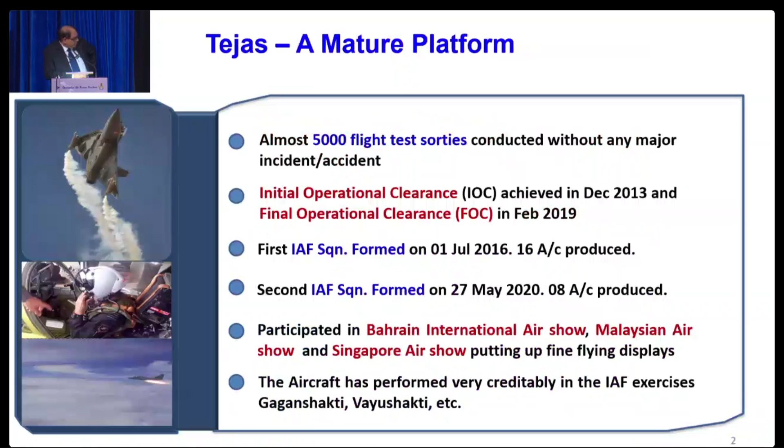Some of the accomplishments of Tejas, other than the obvious ones, which is fly-by-wire flight control and so on, is we have done trials in all the conditions in India, the hot weather conditions, because these are learning exercises. Operating at 48.5 degrees centigrade, how to make all the electronics work and all that. That was a learning. Takeoff in high altitude, hot weather conditions in Leh, as well as operating at minus 15 degrees centigrade at Leh and starting the engine without external assistance.

Achieving good accuracies with the air-to-ground weapons and integration of the missiles, the close combat missiles and the BVR missiles. All these were learning exercises which have been now imbibed, and we are now ready to go ahead with all these technologies. Air-to-air refueling, again a major technology, was successfully demonstrated with the drop tanks and fuel transfer in the air.

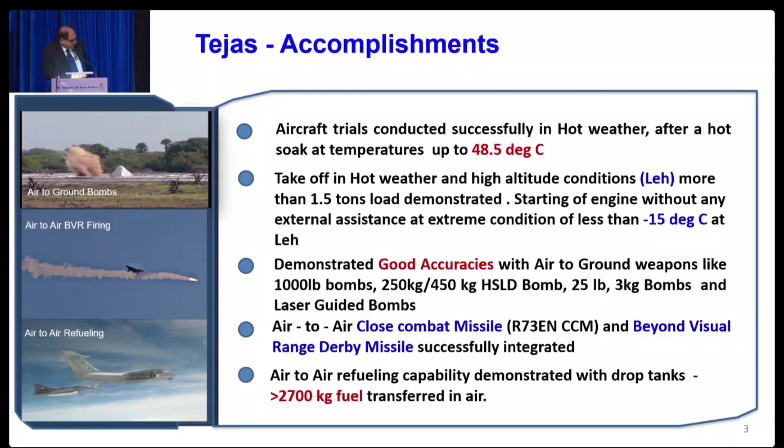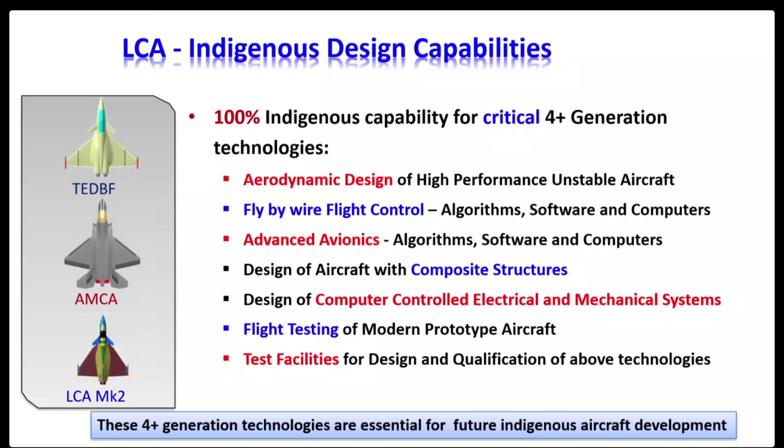So Tejas is not just an aircraft platform. It is actually a representation of maturity of various fourth generation technologies today that we have achieved. And that is really the takeaway from the Tejas program. Yes, there are a lot of imported equipments on Tejas. It's about 60% indigenous, but there are many imported equipments. But one thing that is 100% indigenous in LCA is the design.

And so we have got 100% indigenous design capability in areas like aerodynamic design of such a high performance aircraft, fly-by-wire flight control, the advanced avionics, the integration of all the weapons, sensors and so on, and the displays. Composites, this aircraft has a very high degree of composites. So that technology has now been matured in the country. Computer control of all the mechanical systems, everything is controlled by computers, and that part is also now mastered.

Another technology in which many people here in the audience are involved is flight testing of modern prototype aircraft. Those who have gone through it would realize that we took a lot of time in taking small steps because of the uncertainties, the risks, mitigating the risks and so on. For example, going from 20 degrees angle of attack to 21 took almost 2 years because of understanding what is the kind of risk and how to do high angle of attack flight testing.

The test facilities required for all these designs are now in place and well established in the country for taking up any further designs of this kind. So all these technologies are key technologies required for any future aircraft design in the country, whether it's Mk2, AMCA or, as I said, the TEDBF, the naval version. So this is like the national wealth we now have in this country, which is ready and available for all your future programs.

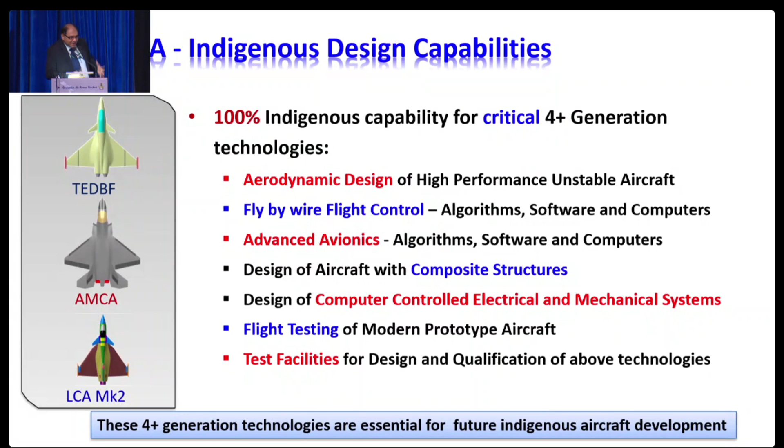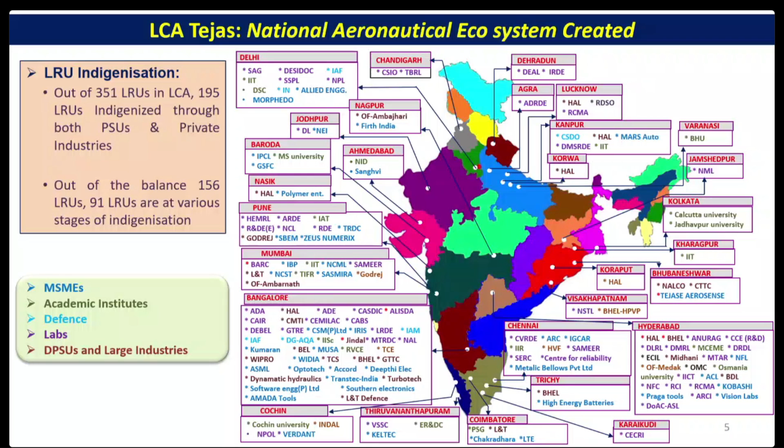It is not only ADA who has worked. The whole nation has worked for this program. And there's a huge ecosystem created in the country. There are more than 300 work centers, small and large, in PSUs, academic institutions, private industries, MSMEs, and so on, who are actively contributing to this program. And this ecosystem is not what HAL has. HAL has a separate ecosystem for production. What I'm talking about is the design ecosystem, which is something unique, available in the country today.

As far as indigenization, as I said, about half the LRUs are indigenized, but rapidly, more than 91 of the remaining 150 LRUs are under indigenization, and more than 40 are through the Technology Development Fund, where MSMEs have taken up 40 LRUs for indigenization. So that effort is also moving very well in the country.

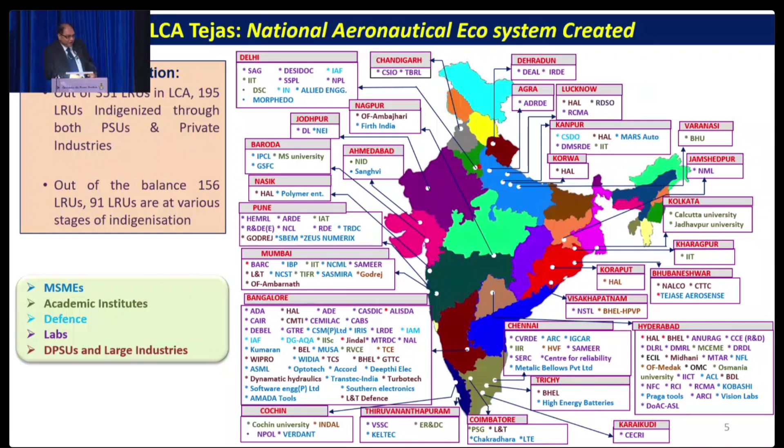So what next? So the next program after LCA was an enhanced version of LCA, a bigger platform, a more capable platform, which was the Mk2. So this was conceptualized as a replacement for the Mirage class of aircraft. LCA was for the smaller MiG-21 class.

And this Mk2 is with enhanced capabilities with AESA radar, internal electronic warfare system. LCA has a podded one. The IRST, MAWS, and various other sensors. Enhanced range and endurance with a higher internal fuel, in-flight refueling, and OBOGS. OBOGS will get integrated in Mk2. OBOGS is ready now. A much higher weapon carrying capability, and capability for carrying heavy standoff weapons of the class of Crystal Maze, Scalp, Spice, and so on.

As far as Mk2 is concerned, the configuration is chosen, the system architecture is finalized, all the design is complete, and the critical design review is also completed. And the detailed design drawings, more than 15,000 of them, of all the parts, are now ready. So we are ready to go into the prototype manufacturing stage.

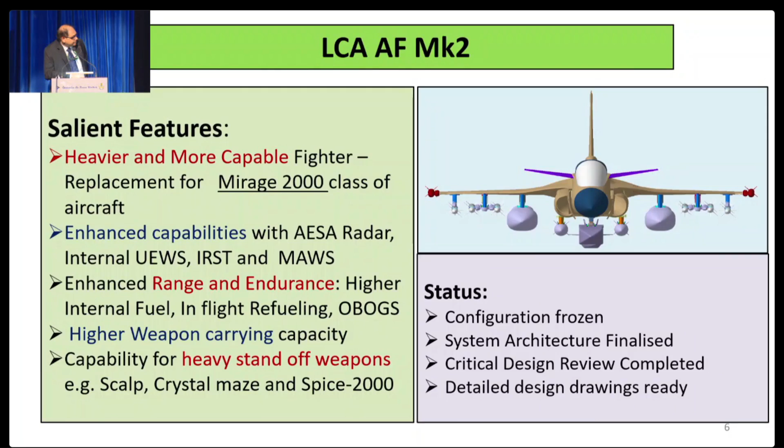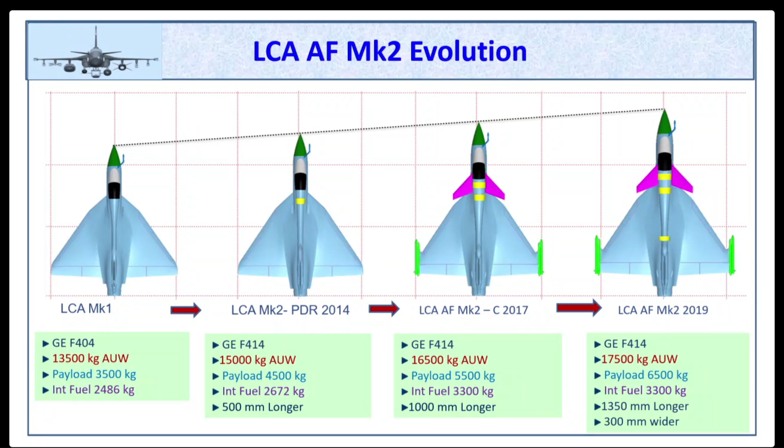Mk2 was an interesting evolution. In the beginning, it was felt that let us just re-engine LCA with a more powerful engine. That was the initial thought process. So till about 2014, we worked on that, and a PDR was conducted where a re-engined LCA was designed, which had no significant changes to the basic design, but only the re-engining part.

Subsequently, because of production, ease of production, it was decided we'll go for Mk1A, 83 more, which is the same structure as Mk1. And at that time, it was felt that then the Mk2, now we can move up to the higher grade, a more capable aircraft with a much higher range and endurance to start with. And this implied carrying more internal fuel. To do that, we had to design this aircraft to take care of the reduced instability due to the additional fuel. And that's how the canards came in.

There was a lot of deliberation between canard, strakes and various configurations. So this was decided finally in 2017. And this shows the maturity of the design process, because the designers now are capable of reacting quickly to changing configurations and coming up with new designs.

And finally, in 2019, we froze on a configuration which could carry heavy standoff weapons. So the aircraft was widened, the length was increased further, and this was the final configuration in 2019, for which the PSQRs were frozen. So this had a much higher capability for payload, internal fuel, and so on. It was a 17.5 ton all-up weight aircraft.

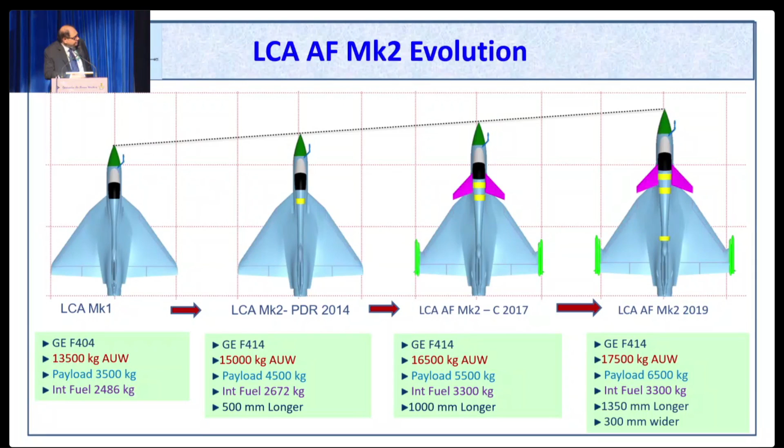The Mk2 incorporates a lot of advanced features, which are over and above the Mk1. Some of them, as I mentioned, were IRST, MAWS, but more importantly, the cockpit has been changed completely now. We are going for a side stick configuration to enable a large area display and advanced HUD also in the cockpit. So this is a very modern cockpit, which is coming in Mk2. And it has got, as I said, an internal electronic warfare system.

Another important change is the multifunction air data probes in the nose. So we have removed the nose probe, which improves the radar performance significantly. So the probes are all behind the radar. And that is an important change, the multifunction air data sensors. And many more, OBOGS, in-flight relight capability, and so on.

Now, what is important here is all these are new features beyond LCA. LCA design was in the 90s. So these are all the new features which are coming into Mark II, which flow seamlessly into all the future programs. And we had to take this jump because for a new aircraft, we would rather go for the newer technologies, as Chief was mentioning also in the morning.

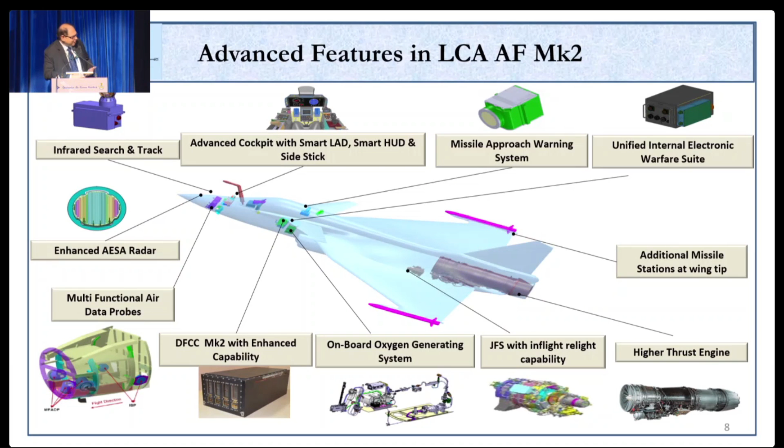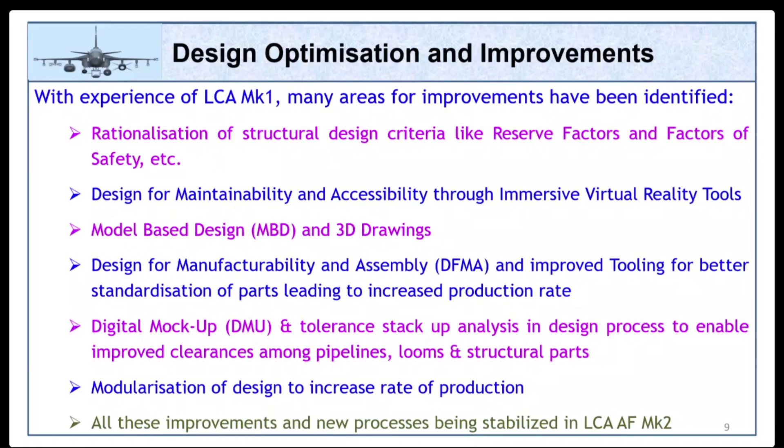And there are many more improvements that have been incorporated in Mark II. These are lessons learned from Mark I. For example, the structural design criteria has been rationalized completely based on the experience of Mark I. To some extent, Mark I in some places was conservative design. So all that conservativeness has been worked out, and we have evolved a new design process for structural design, which helps us to reduce weight significantly.

The design has catered for maintainability and accessibility right from the design phase, which did not happen in LCA. So, for example, using virtual reality tools, the field engineers, field operators from the Air Force actually try out on the VR model whether maintenance is possible, whether parts are accessible, and so on, right in the design phase before the aircraft is made.

So that is something we have done here. Another important thing is model-based design. So, for example, drawings are no longer 2D drawings on the paper. They are 3D models. And this was not easy. It can happen easily in your lab, but it also has to happen on the shop floor. The shop floor technician should not finally print out a drawing and start using it. So you have to provide him the tools to be able to see 3D models on the shop floor. And that is what has been done.

And of course, design for manufacturability, assembly, which are lessons learned through the Mark I program, DMU, and so on. So a lot of new features have come in here. And all these improvements are actually flowing into all the future programs. And Mark II is a good case study or a good example to implement all these so that all these are also matured for the new programs. And we are at that stage now. In Mark II, this has been done now in the design phase.

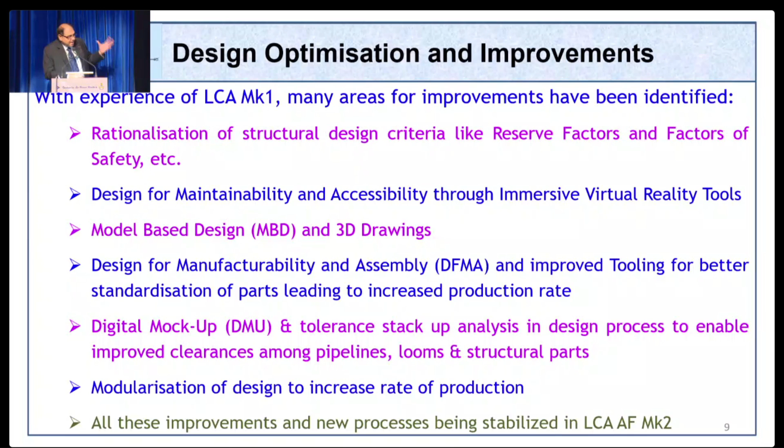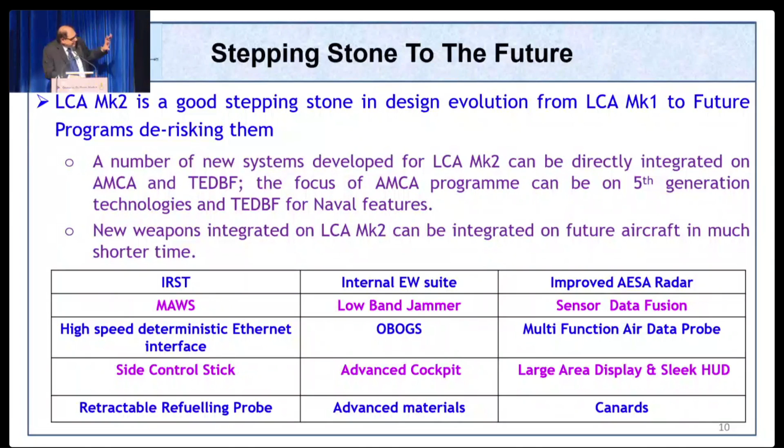So the Mark II is a very good stepping stone in the design evolution from LCA Mark I to all the future programs, which de-risk them. So that when we are in AMCA, we concentrate on the stealth technologies and not the basic aircraft design technologies, which are actually matured through Mark II now. So these are the list of all the technologies which are already integrated in Mark II, which will go into the future programs.

So the next program that is already underway is the 5th generation AMCA program. And it is a twin engine stealth aircraft. So there are many new technologies, twin engine for the first time. And of course, stealth shaping, an internal weapon bay to carry the weapons in the stealth mode, various materials and radar absorbing structures. And it was decided with the IAF that AMCA will be developed in 2 phases, the Mark I with an existing engine and Mark II with an advanced engine, more powerful, for which the design is underway now.

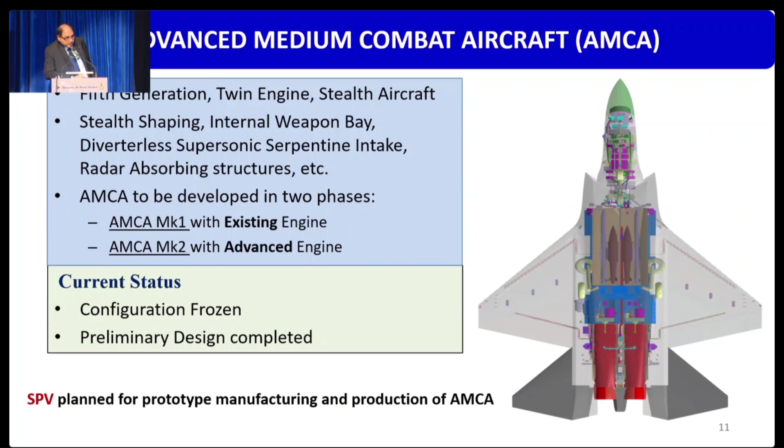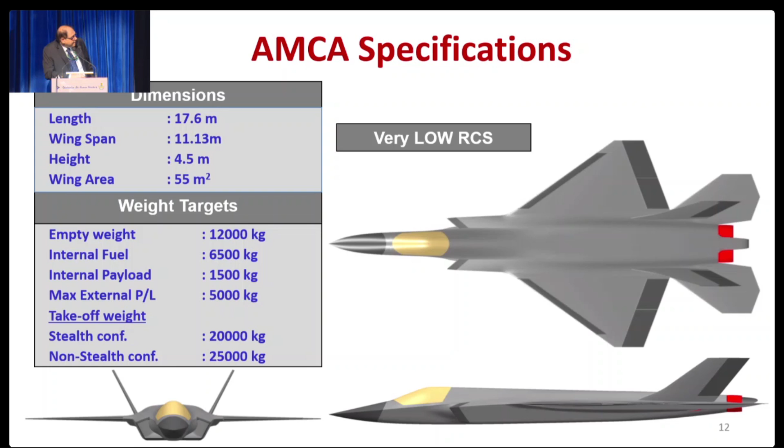So the current status of AMCA is that the configuration is frozen, PDR is completed, and we are entering the CDR stage. Towards the second half of the year, we should have completed the CDR as well. And for AMCA, an SPV is planned, a special purpose vehicle for the manufacturing and production. And this decision has been finalized. The AMCA is, of course, a 25-ton aircraft, all-up weight in the non-stealth configuration. And in the stealth mode, it can carry 1.5 tons of payload. And non-stealth, it can carry 5 tons more. And of course, it's a low RCS aircraft. These are the AMCA stealth and non-stealth configurations.

So parallel to this, as I mentioned in the beginning, there is a very important aspect of aviation which we are handling through the naval combat aircraft development. This started parallelly with a small team in about 2003 and has progressed. And for this, there have been 2 prototypes which have been built, NP1 and NP2. And more importantly, a facility has been created in Goa called a shore-based test facility, which has the arrested landing and ski jump takeoff completely replicated as on the ship, all the features. And so on this, the LCA Navy accomplished its first ski jump takeoff in 2012.

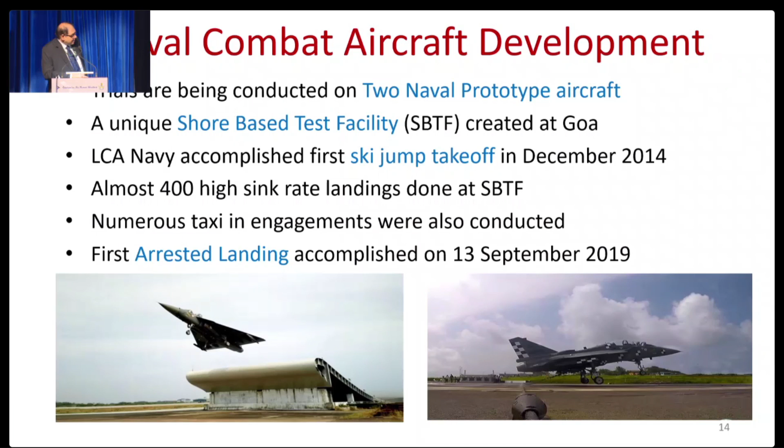And after that, before we did arrested landing, we did an extensive campaign of high sink rate landings to see the capabilities of the aircraft and to see what has to be improved. There were a lot of iterations here. So almost 400 high sink rate landings were done at SBTF before finally we did the arrested landing in September 2019. Subsequently, because of this extensive exercise that was done on SBTF, within about a month or 2 months, by January 2020, we landed on the ship, INS Vikramaditya, and did 18 takeoffs and landings on the carrier.

So this gave a tremendous confidence both to the designers and the services that now we had reached a place where we could take up a naval aircraft combat design as well for the Navy. And that's when the Navy came up with the twin-engine deck-based fighter as their requirement as a future replacement for the MiG-29 class and future aircraft.

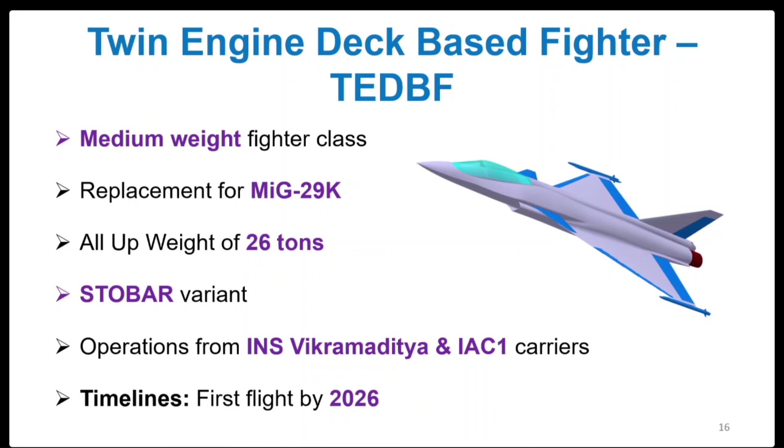So the TEDBF has been conceptualized as a 26-ton all-up-weight aircraft, a replacement for MiG-29K to start with. It is a STOBAR variant, that is short takeoff but arrested landing. But at the same time, we are looking at what changes we need to make to this aircraft to make it a CATOBAR variant for the catapult launch. So an advantage of this aircraft is it is designed for our carriers, unlike the other way around. So it's designed for INS Vikramaditya and IAC-1.

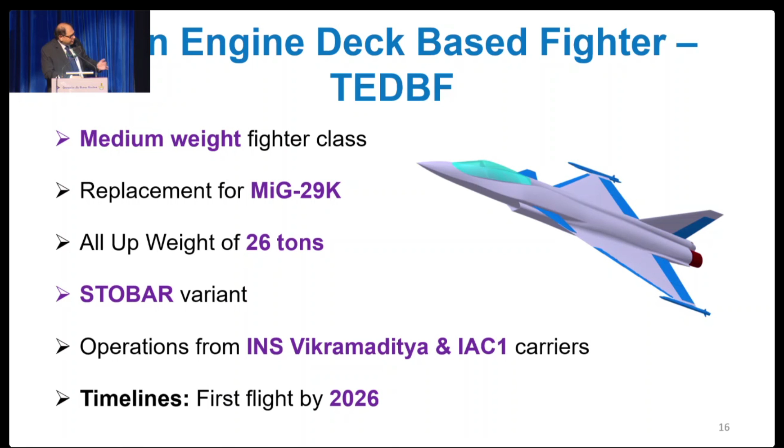We have studied the carrier, all the limitations of the carrier, and brought it into the aircraft design to make sure it can operate completely on this carrier. And the first flight of this is planned by 2026. The PSQRs are finalized, and we are in the PDR stage. The configuration of TEDBF, of course, there is one more new technology here, which is wing folding, which also we have progressed with. And that is one extra technology. But twin engine comes from AMCA, the canards come from Mk2, and so on. So it's a consolidation of technologies from other programs as well.

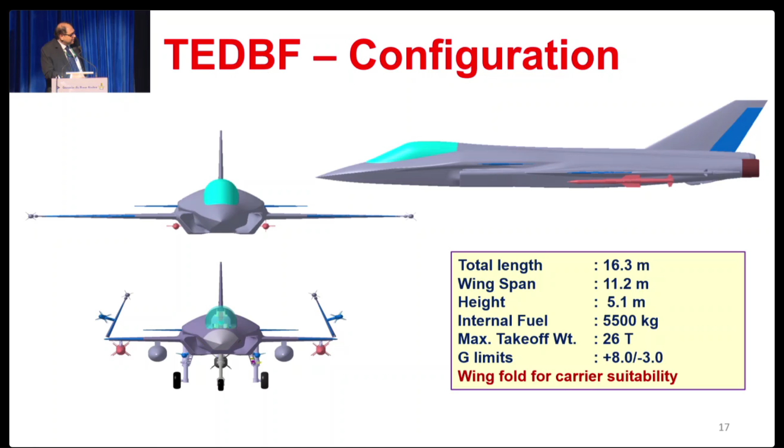But one of the important things is proper phasing of the programs. I talked about 3 programs. They didn't happen at the same time. We told the management that you cannot give us 3 programs at the same time and try to do it. It will not happen. So it was phased. There was roughly about a 2 years gap between all the 3 programs as far as our design activities are concerned. The Mk2, the AMCA, and the TEDBF. So there is a 2 years gap so that the core designers can concentrate on one program, take the design to some level of maturity, and then pass it on to the next level.

Because any mistakes you do in the beginning of the program will live with you for your lifetime. And that is the critical phase. So that's what we are concentrating on. We keep the designers focused on one program. Only when they do the PDR stage and make the initial decisions, then we take up the next. And then the second one can take over. So this is how we are doing it, by phasing.